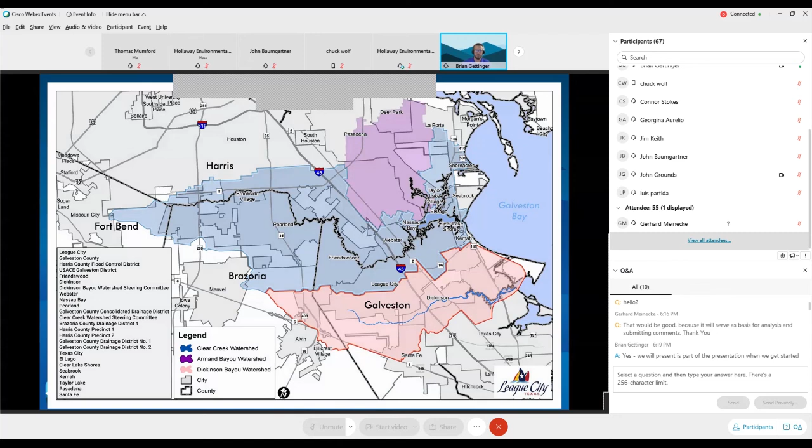So we'll have another meeting next week on Clear Creek. You jump back to the previous slide there. Another meeting next week on Clear Creek, which, as you can see on the map, has got a few different colors breaking that apart. Dickinson Bayou is a little less complicated as far as who is working on the project. We'll talk a little bit more later with information from Galveston County and their consultant RPS on the mainland Galveston County drainage study, which is sponsored by the GLO.

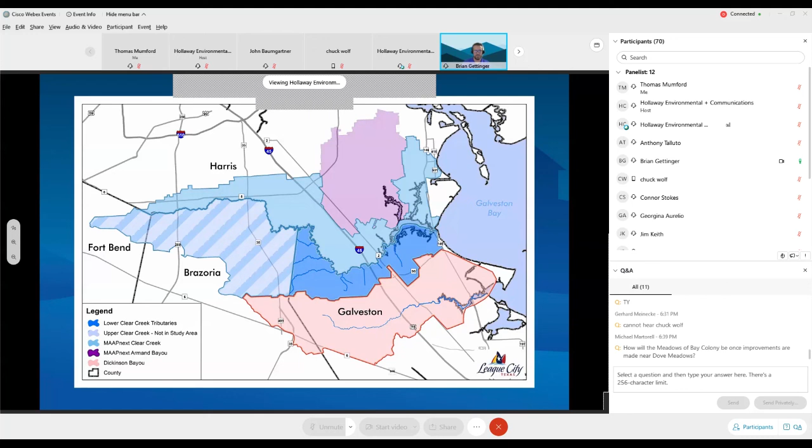So obviously, we're here today in part because of the impacts from Hurricane Harvey in August 2017. It's hard to believe it's already been 3 years, and many things have been happening since then. Our goal is to get these studies done so we can start turning dirt and prevent those flood damages from happening again in the future. We had never before seen precipitation amounts in the region, record high water surface elevations in Clear Creek and Dickinson Bayou, and widespread flooding in both rural and municipal areas.

So one of the first steps of this project was delineating the watershed. Delineation is a fancy engineering word for determining which way the water is going to flow when it hits the ground. Does that water flow into Dickinson Bayou, or does it flow into Clear Creek? That's really important to know when we're looking at modeling and how much flow and how deep the flow is. It's also very challenging, unlike in the Rocky Mountains where there's a big mountain range and water on one side goes one way and the other side goes the other way.

The whole area east of I-45 is pretty flat. In some cases, roads actually act as the delineating factor between one way or the other. You can see that from Highway 3 kind of in the middle of the page. So this is the first step, delineating the Dickinson Bayou watershed, making sure we know which way the water is going to flow. And so we've done that, looking at new LiDAR topography data, so we have a clear identification of the entirety of Dickinson Bayou. Go on to the next slide.

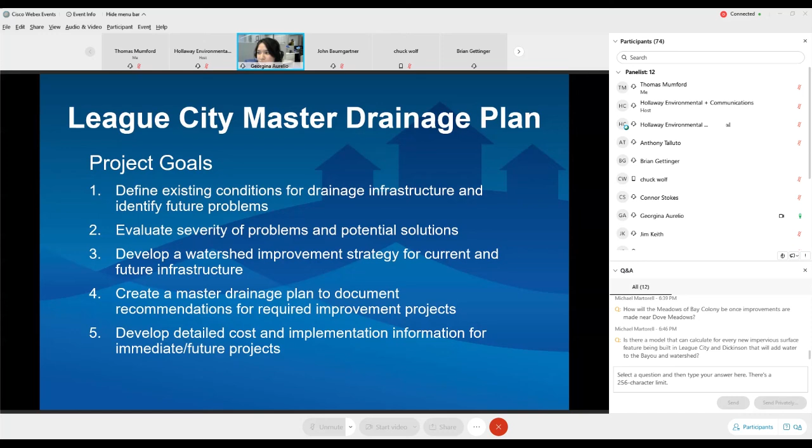LJA is currently studying the watersheds in the city as shown, as well as incorporating studies by others for Magnolia Creek, Cedar Gully, and Benson's Bayou. Major overlapping studies such as Galveston County Master Drainage Plan, Lower Clear Creek, Dickinson Bayou, and MAAPnext Flood Insurance Study will be referenced in our own study. We will compile all these findings within the watershed improvement strategy and recommendations for required future projects.

Awesome. Thank you, Georgina. Appreciate your update on that. With that, we're going to talk a little more detail about what we're doing in phase 2, which is really focused on hydraulic modeling. So the next slide shows a couple important definitions that we want to go through. Again, engineering terms that are thrown around a lot on presentations like this, that we want to make sure everyone understands what they are.

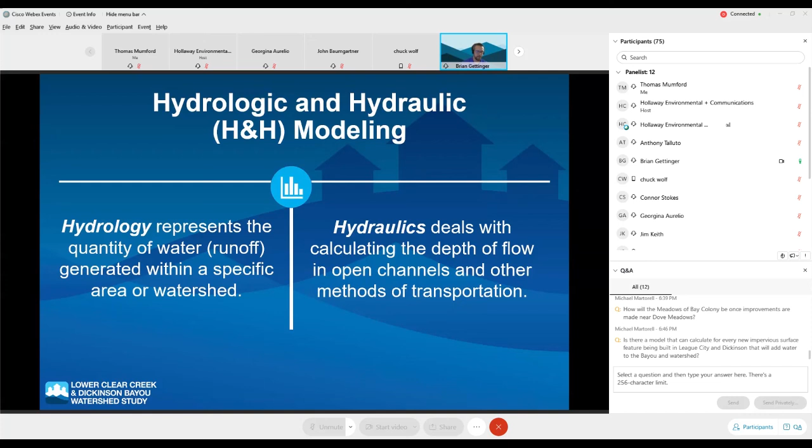So hydrology represents the quantity of water that's generated within a specific area or watershed. So when it rains 12 inches in 24 hours, we're talking about hydrology. Hydraulics deals with calculating the depth of flow in open channels and other methods of transportation. So how is the water, when it hits the ground, making its way out to Galveston Bay? That's hydraulics. And so we're talking about a little bit of both things. And at this point, I want to invite Jim Keith, our technical lead for the project, to talk a little bit more about how those general hydrology and hydraulics terms apply to the Dickinson Bayou watershed.

The other important factor that we're using in this study is the latest rainfall data for Texas that has been developed by the National Oceanic and Atmospheric Administration called Atlas 14. You may have heard a fair amount of talk about Atlas 14, but that's the best available rainfall data that's been developed. And one of the big changes that was shown out of that study was an increase in rainfall depths, primarily in the southeast and the Houston area, as well as central Texas.

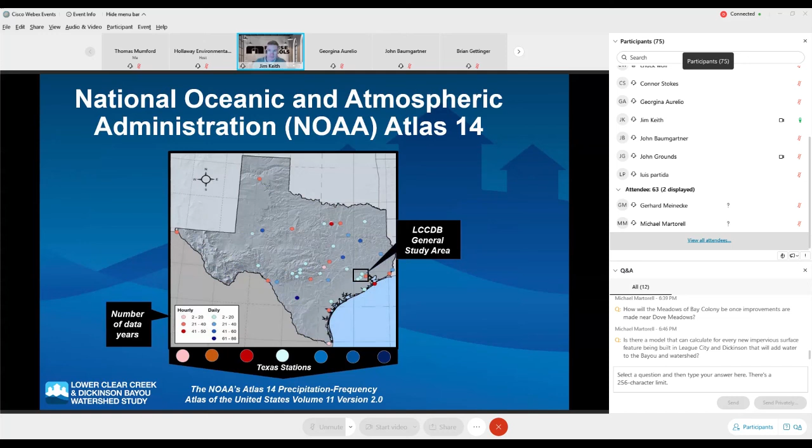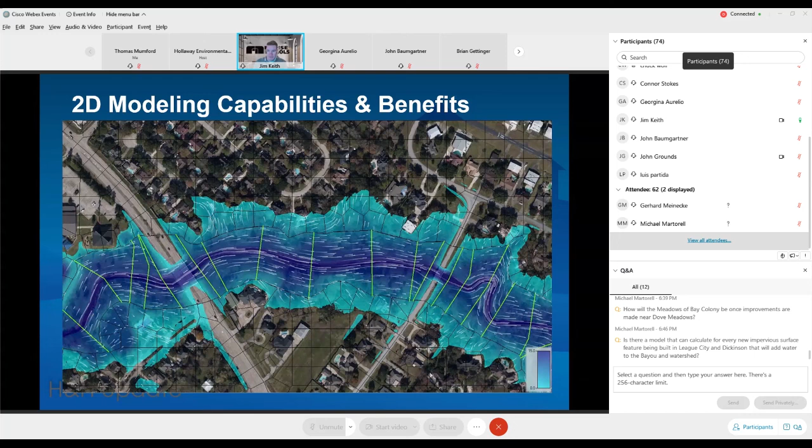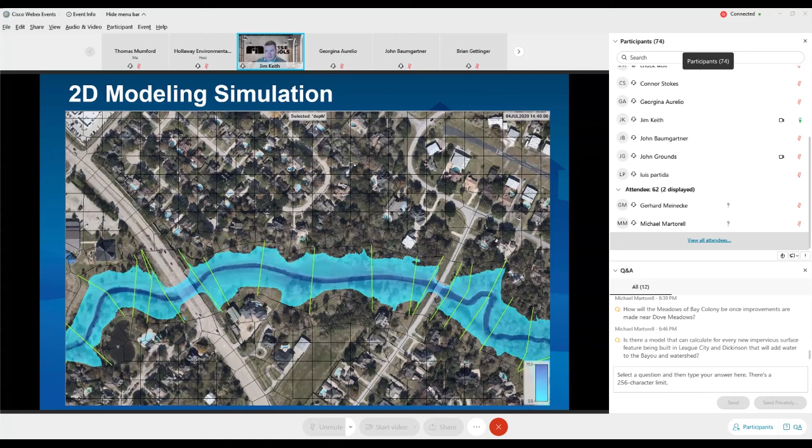And if you go to the next slide, we'll kind of see an animation here. The other great benefit of these 1D, 2D models is they capture the full range of the flood as it rises and falls. So whereas maybe in the past you typically look at a snapshot in time of the peak elevation in a given area, now we can look at the rise and fall of that water and not only where it floods, but also how long. So as we look at areas that get underwater, structures that get inundated, we know that's going to occur for 3 hours or 6 hours. And so that helps us identify the flood risk as well.

An important thing to point out here too, just in terms of visual representation, these roads are not actually overtopped. You see the blue going through those roads; that's actually the water going under the bridge. So there's still some interpretations as you look at this data. So feel free to ask questions as we get to the end. But that kind of sets the stage for the work that RPS has been doing. And with that, I think I'll turn it over to Luis.

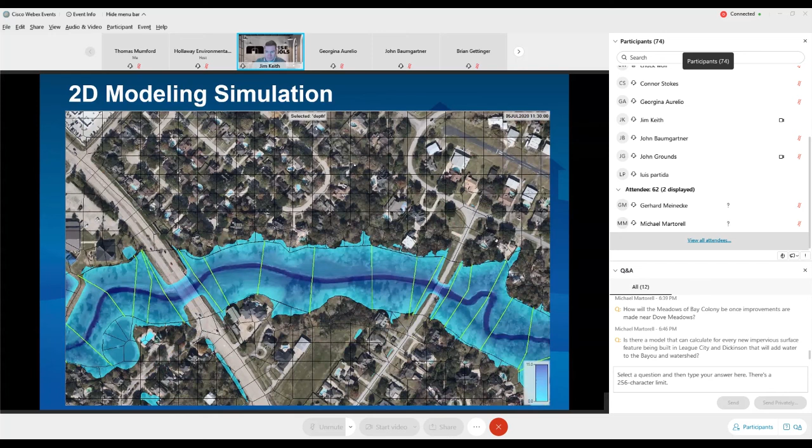Hi, my name is Luis Partida with RPS. I'm serving as the technical lead. We are performing an update to the Galveston County Master Drainage Plan, which is focusing on the mainland portion of Galveston County. In coordination with the LCCD project, the county is developing the Dickinson Bayou model, whose overall watershed is outlined on this slide in black. A portion of the watershed extends into Brazoria County and is included in the overall watershed analysis. We will be discussing the methodologies and showing some preliminary results in the following slides. Next slide, please.

This map shows the 79 sub-watersheds delineated for Dickinson Bayou, as shown in green. A watershed's boundary is defined by high points in the terrain or structures such that runoff generated within each boundary will not extend into another boundary unless a large hypothetical storm occurs. For hydrologic modeling efforts, these are further subdivided into sub-watersheds shown in the exhibit. Once delineated, each watershed was analyzed to calculate its unique hydrologic characteristics like the time of concentration, detention provided, percent impervious, and loss rates. Next slide, please.

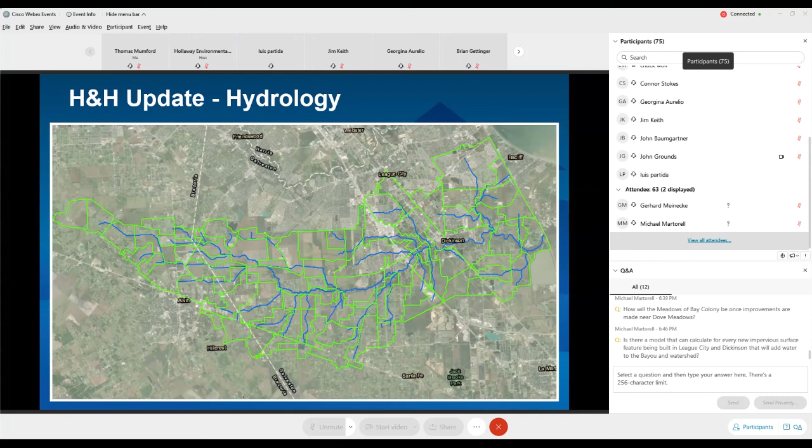Utilizing those sub-watershed boundaries previously shown, the hydraulic modeling boundary was determined and used to analyze the extent of inundation. The boundary is shown as the gridded graphic on the screen, which we refer to as the 2D mesh. The 2D mesh allows for runoff developed from sub-watersheds to travel over time to the tributaries and then the main stem of Dickinson Bayou, which are represented by 1D cross-sections connected to the 2D mesh. The 1D cross-sections are shown in green and are a series of elevation data points representing the underlying terrain.

The interconnectivity of the 1D cross-sections with the 2D mesh post-simulation allows for detailed hydraulic outputs, which are comparable to previous FEMA outputs with the addition of extended inundation boundaries shown in the mesh, as well as time-based results similar to what Jim was showing on the previous slide. In the past, inundation or flooding extents were limited by the length of the 1D cross-sections, and if excessive lengths were required to span the floodplain, the risk for potential inaccuracies increased. Next slide, please.

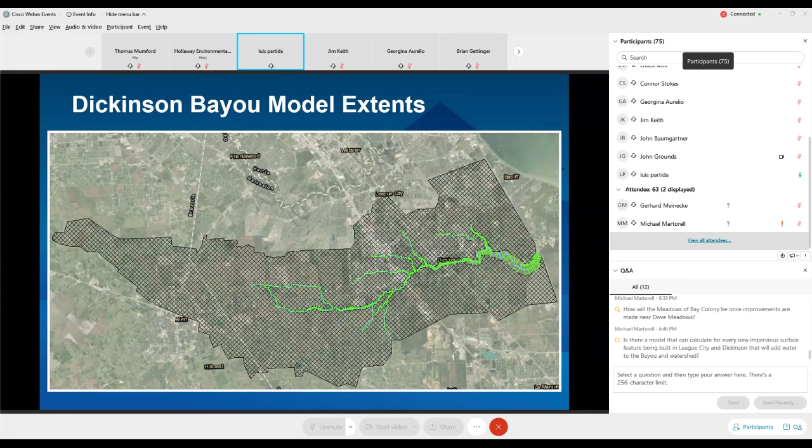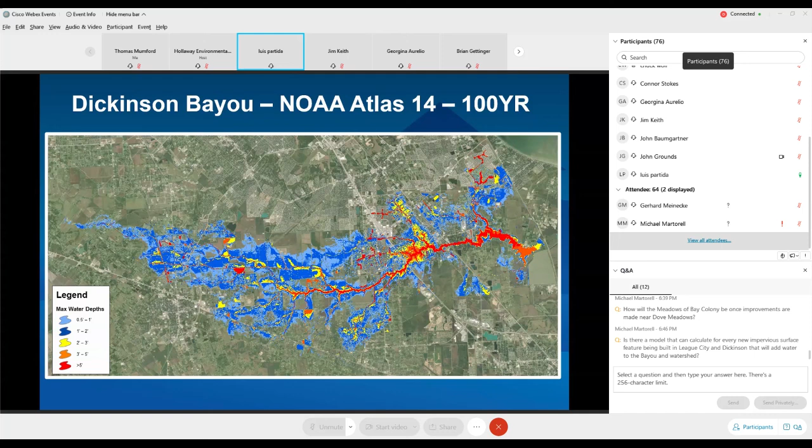The Atlas 14 100-year maximum inundation extent for Dickinson Bayou shows higher inundation levels at and around the tributaries of Gum, Benson, Magnolia, and Borden Gully. The modeling simulation also considered the tidal influence of the confluence with Dickinson Bay. Again, these are our preliminary results for the 100-year NOAA Atlas 14 inundation extent. Next slide, please.

Shown here is the Hurricane Harvey simulation, which was greater than a 100-year storm. Real-time rainfall data was processed into our base hydrologic model to calculate real-time peak flows that occurred during the actual storm. These peak flows were then input into our 1D, 2D hydraulic model and ran for a 5-day simulation in order to capture the full extent.

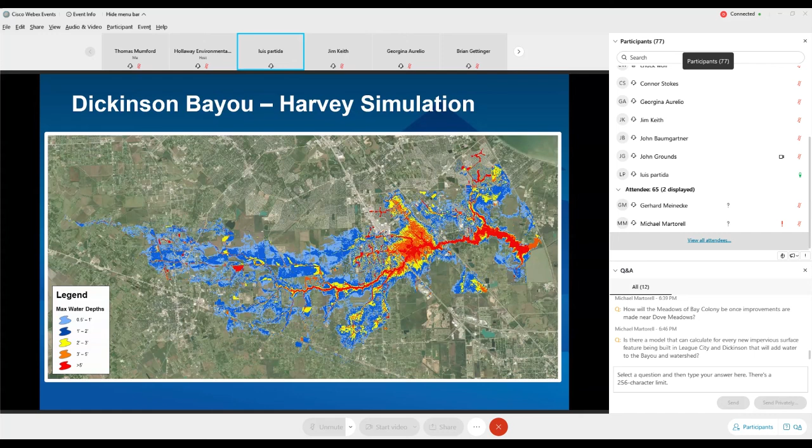During Hurricane Harvey, a less than 10-year surge occurred at the confluence of Dickinson Bay and was reflected in this hydraulic model. The maximum inundation extent for Dickinson Bayou shows higher inundation levels than the 100-year results at and around the tributaries of Gum, Benson, Magnolia, and Borden Gully. And with that, we'll turn it back over to Brian.

Awesome. Thanks, Luis. Appreciate you sharing that. And just to reiterate the importance of bringing in the model information from Hurricane Harvey, we need to validate that, again, our model is not only precise but accurate, right? And so bringing that real-time rainfall data in and running the model for Harvey helps us do that. So that is the first bullet there, which is a complete QA/QC and model calibration.

Now that we've pretty much gotten that complete, I know Luis and our team have been working on that hard just over the last few weeks, actually. We are on to evaluating the mitigation concepts. So that brings us very near the conclusion of phase 2 and very near what's really restarting phase 3. We had begun phase 3 before in parallel, and now that we have the model, we can begin advancing these concepts and evaluating them with the model, which is, at least for me, one of the exciting parts of the project. We're getting close to the solution sets at this point.

So let's talk first, the way the water flows is a function of topography. So this is a heat map showing high and low elevations. So on the left side of the screen, on the west side, we've got kind of a white color, then yellow, then green. That's the high ground. You can see it starts to go down, right, and becomes red, and then yellow, and then a darker red, and then almost a pastel red, almost a pink as it enters Galveston Bay. So the water wants to flow from west to east, which isn't surprising, right? That's how the main stem of Dickinson Bayou flows.

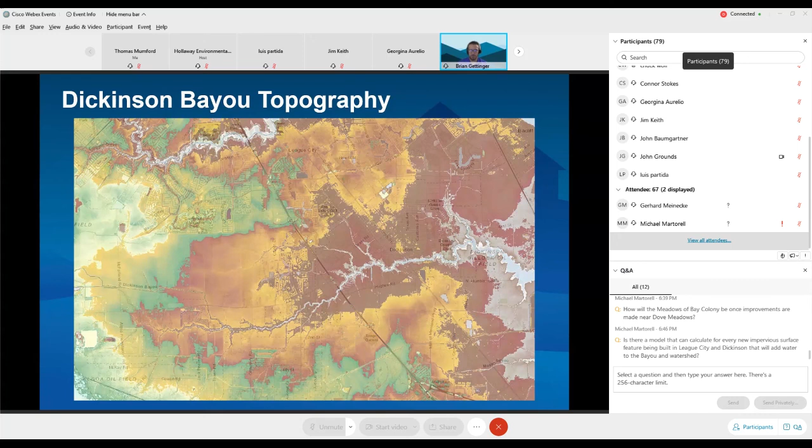So the next slide talks about how we've broken down the bayou by reach. So these are arbitrarily defined by us. This is not a FEMA designation or anything from the Army Corps. But we wanted to make sure we could designate areas along the bayou because it's a pretty long reach, so that when we talk about concepts, we're talking about concepts in different reaches. So we'll start on the upstream side, which is shown in green, which we'll call Reach 1. Reach 1 is north of FM 517.

So right now, that area is predominantly rural. There are some low-density residential areas in there. But as you might be able to see on the map, there's a gray line with a 99 on it. I think most folks on this call will know that is the potential route for the Grand Parkway. So obviously, if the Grand Parkway is built, it's going to dramatically change the land use in that area. What is a mostly low-density or agriculture area now will change dramatically, which obviously has impacts on the bayou downstream.

Reach 2 is FM 517 to I-45. And so you see that there's actually two bayous delineated. There's a main bayou on the west, and then there's an existing bypass channel on the east. We've got both of those called out there in a section in the middle. So Reach 2 gets us to I-45. You start becoming suburban. You've got quite a few residences that line the bayou on either side, folks that have docks and water access on the bayou. And then Reach 2 stops there at I-45.

And then Reach 3 starts at I-45 and continues all the way out into Dickinson Bay and then to Galveston Bay. So you go through the heart of Dickinson along what at one point was a heavily used shipping channel for barge traffic. So we've got 3 reaches, all about the same length, and those are kind of distributed by different transportation corridors. You can go on to the next slide.

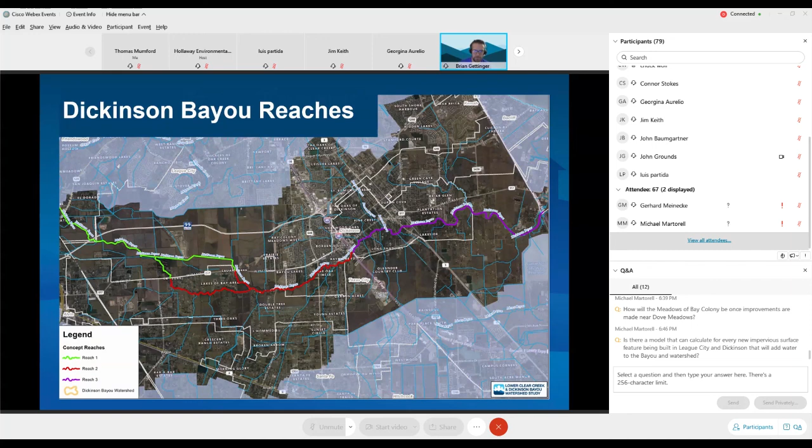So we've got some of our concepts here, and these are what we've brainstormed to date. This, I will say, is not necessarily everything that could be. So if you have other ideas, as we talked tonight about things you thought about since Hurricane Harvey, please share those with us. But we've got projects coded here, some in blue and some in red.

So blue are mostly conveyance solutions. Red ones are mostly detention solutions. They're coded by reach. So these are all DB, because we're all Dickinson Bayou. Reach 1s are DB1. And then within those reaches, they're coded by alphanumeric, A, B, C, and so on. So conveyance solutions are important. We're trying to move a lot of water from west to east. You can go back to the previous slide just for a second. Trying to move a lot of water from west to east.

We have detention solutions right now, predominantly in the upper sections. Detention generally is more effective in the upper part of a watershed, trying to hold back that flow before it flows through and let it out slowly. There is one detention solution in the eastern part of the watershed, in the downstream section, as part of a conveyance project. But detention by itself is generally most effective upstream. That's why you see that happening there.

Honestly, as we look at all this, no one solution is going to solve the problem. So when we come back to you in March with here's what we think we should do on Dickinson Bayou, I expect what we'll tell you is that we're going to do this in Reach 1, this in Reach 2, and this in Reach 3. It's going to be a suite of solutions working together to mitigate flooding along the entire bayou.

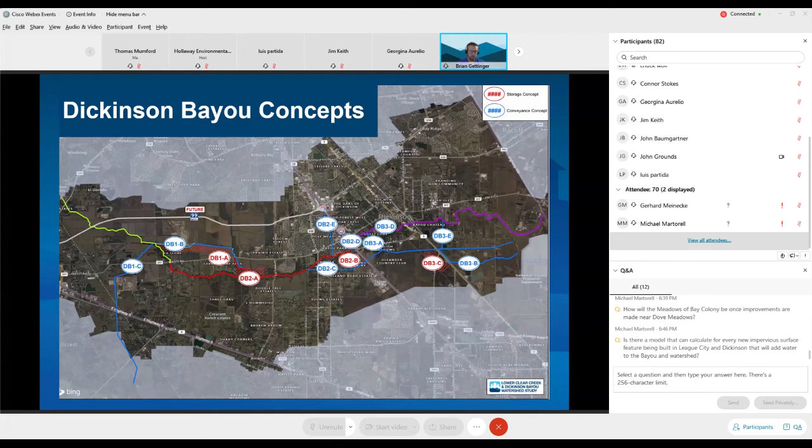So we want to walk through a couple concepts that we've been talking about. We're not going to have time to walk through all these tonight, but a couple to give you a feel of the scale and the types of projects we're thinking about. So we'll start in the downstream end. This is a project that is a bypass channel, which is shown in white here. The green line is Dickinson Bayou. The yellow lines are tributaries to the bayou. And you've got I-45 here on the far left side of the screen.

The white line is a proposed bypass channel, about 27,000 feet long, that will act as a straw to take water out of that bowl and deliver it downstream into Dickinson Bay. This area currently has a lot of tributaries coming in and not a lot of way to get the water out. So we want to provide an opportunity for that water to escape through a bypass channel. The bypass channel would look pretty similar to what you see in the region for canals moving water, like raw water canals.

It's something that would probably only have a lot of water in it when it was flooding. It's not going to divert the bayou permanently. This is not a permanent bypass. This is a flood diversion, so we're thinking at this point. And possibly that first segment right along Dickinson Bayou could present an opportunity for a recreational amenity. That's one thing we want to think about: not only how can we prevent structural flooding, but how can these projects benefit the community? So go ahead and go on to the next slide.

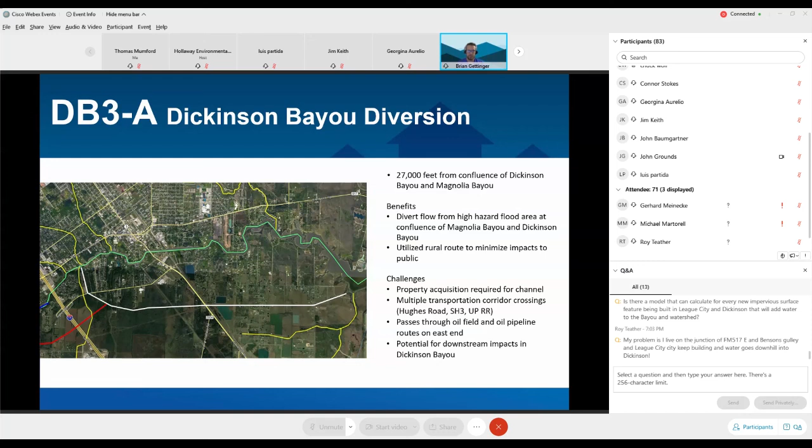So we're walking our way west. You see in the upper right-hand corner of that picture the white line, which is our diversion channel. This section of the bayou is interesting. As you get west of FM 646, the bayou has a lot fewer structures on it. But east of FM 646, there's quite a few homes right along the bayou that have docks and things.

So the conclusion we've come to up to this point is that, you know, if we want to do a channel improvement and increase the capacity of Dickinson Bayou, that is probably most suitable west of FM 646. As you approach FM 646, because of the density of structures along the bayou, that would be a very disruptive project. And we are proposing potentially a bypass channel that would cross I-45 and then connect with the other bypass

channel downstream. So all of these projects at this point are conceptual in the sense that we know we need more conveyance, right? And the question is, how can we provide it? What we'll do with these is take them into the model, build them in the model, and then run the rainfall simulations. And those rainfall simulations will show water going down the bayou and then potentially going through these channels, and we'll determine how effective they are, how big they need to be in size, and then how effective they are at mitigating the flood risk.

And so what we'll probably find is that the extents, the in and out locations may change, or the concepts themselves may change, or we might have new concepts altogether. But wanted to share kind of what we're thinking on a couple of these. So those are both conveyance solutions.

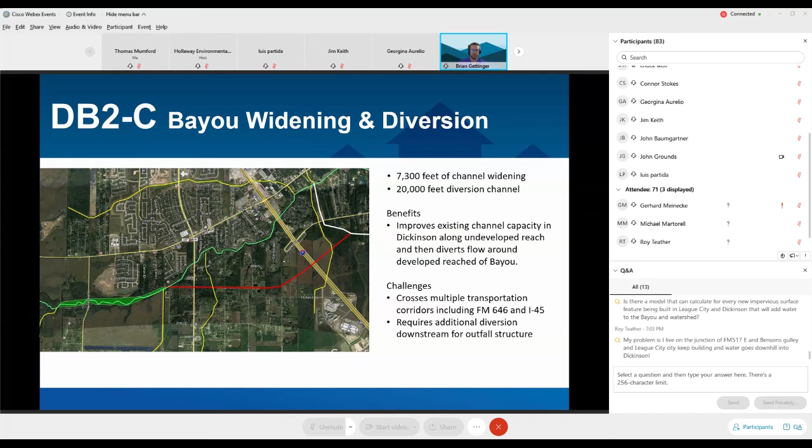The last one is in Reach 1, and this is a detention solution. This is north of FM 517 in the section of Dickinson Bayou where it actually currently has a bypass channel. So at this point, we're trying to provide detention to prevent flow from entering the downtown Dickinson area as quickly as it does currently, right? So we're detaining flow in a detention pond. That pond is located along the bypass channel.

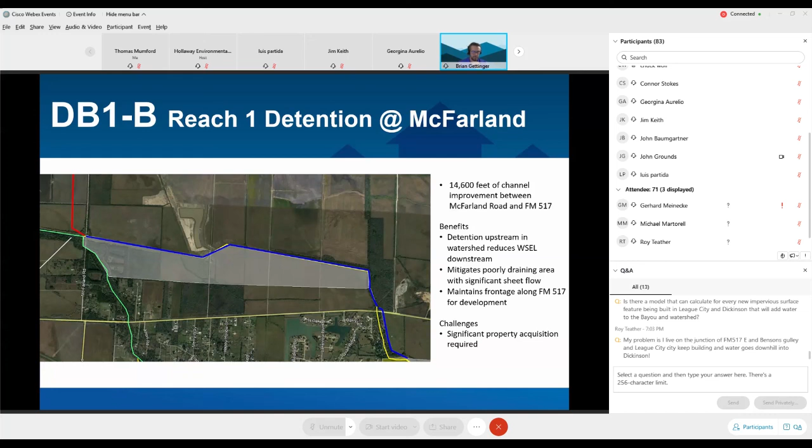We set it back away from FM 517 because that property right along the road frontage is likely to be very valuable. Want to retain it for future development. But we need to provide detention in the system, right? So this detention would be located there. Like other detention ponds we've seen, they may have a small wet pool, likely predominantly going to be a dry pool, and then would fill up during a storm event. All right, go ahead and go on to the next slide.

So I wish we had time to go through all the concepts in great detail, but there obviously are more than three we're looking at. Those are just kind of a flavor of the types of projects we're looking at for this stage. So comprehensive evaluation, what does that mean? That means that certainly we're going to look at capital cost, right? And certainly we're going to look at flood damage reduction.

But there's other factors that matter on flood control projects. This is not all about benefit cost ratios. That's certainly an important metric, but we want to make sure we look at what we call non-cost factors, as well as number of people and critical structures that are affected by projects.

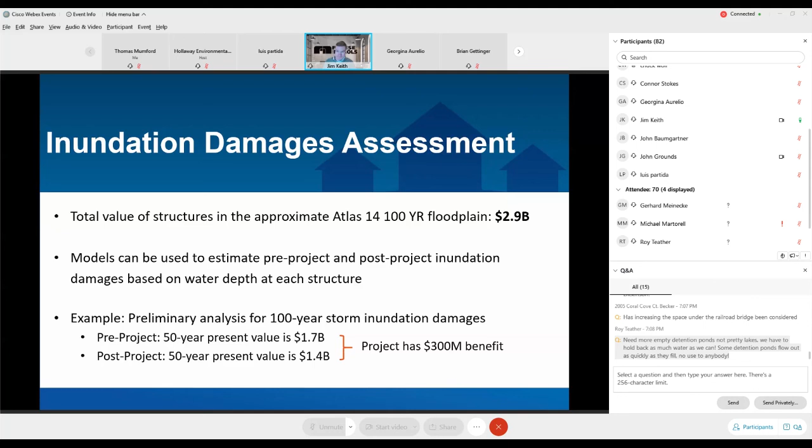All right. Thanks, Jim. So where do we go from here? We've done a lot. Got a lot of new information, and that hydraulic model will have a lot of uses for the entities in the region besides just our study. But where do we go from here? Go on to the next slide. We'll talk about kind of the milestones that we have coming up the rest of the study.

So October's got a couple days left. So we'll have the model finished, go into QA/QC and calibration, get that completed. We'll re-kick off, as we talked about, the concept evaluation, looking at what we've brainstormed to date, looking at the model itself and seeing what it tells us about areas that are problematic, areas we need to focus on, and solutions that may benefit that area, whether it's detention or conveyance or both. We'll take feedback from this meeting and incorporate it into those concepts.

A big part of this project is, once we recommend a solution, how do we go to the next step? What is the next step? So we'll have a report included as one of the submittals about recommended funding mechanisms, and then we'll have a final report presenting our findings and recommendations in March, and we will have another round of public meetings to present those conclusions and findings, one that will go into quite a bit more detail about the projects we are recommending for Dickinson Bayou, what they look like, the impacts it will have, and obviously the benefits that the project will have in the region. So we'll go on to the next slide, and we'll show visually where we're at on the chart.